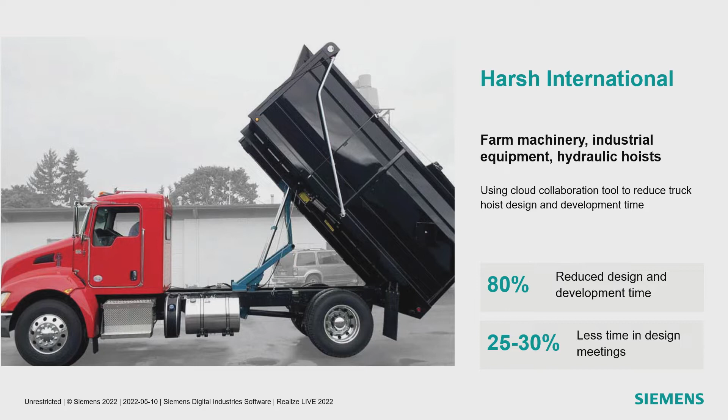Harsh International is a manufacturing company in northern Colorado. We manufacture everything from livestock equipment to hydraulic truck equipment.

Bob came to me with the idea to create a larger hoist, but one that doesn't have the cylinders swinging underneath the truck. With Xcelerator Share, we could click on it, send it to Bob. It didn't matter if it was over the weekend or he might have been in the office next door looking at it. Those guys would be able to pull it up on their computer and just take a look at everything and say, this part could be a little bit different. And I was able to just bounce back those ideas really fast between all of us.

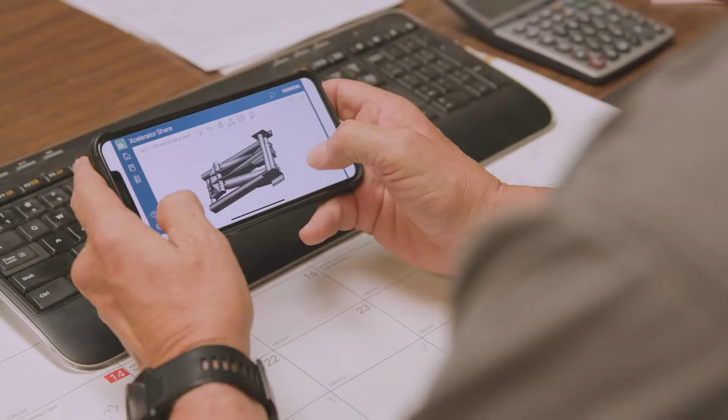The need for people to be in the same room is not near as important as it was before. Now it's on a computer screen. Everybody knows exactly what needs to be done. As soon as they complete it, you see the result right there on the drawing, the 3D solid model I'm looking at. The time you spend addressing that issue is dramatically reduced.

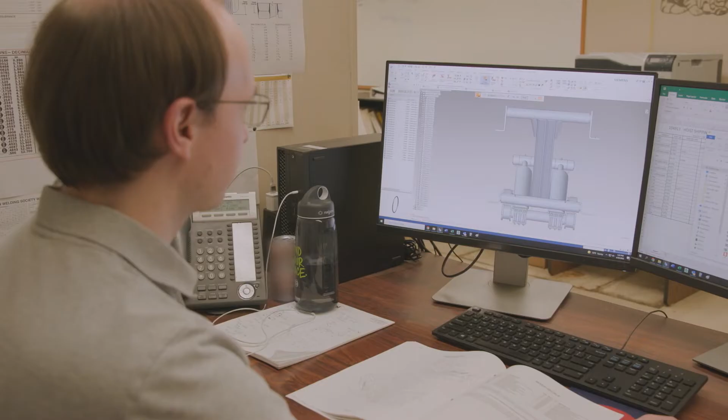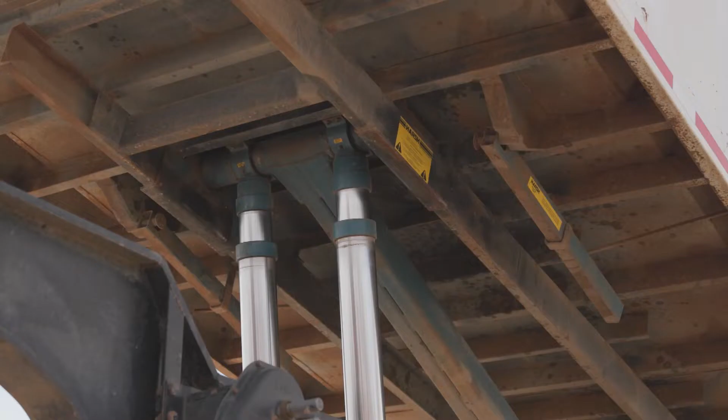Being able to take that hoist from conception to fruition and then on to production in something in the range of 3 to 4 months was awesome. Hitting that market as fast as you can means taking advantage of that market as quickly as you can. That's what Share has done for us.

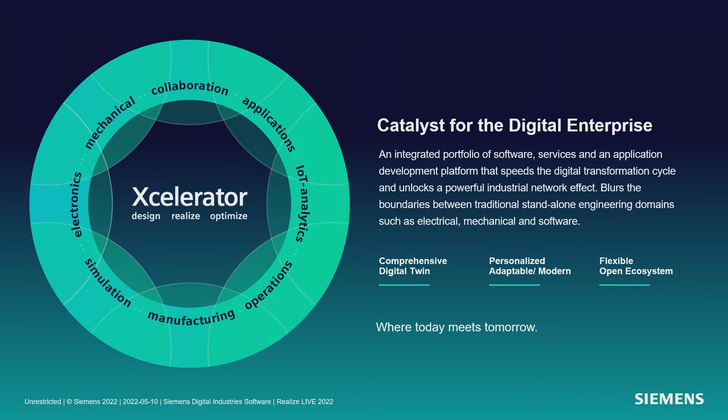Really, Siemens Digital Industries is all about how we help companies like Harsh and like yours transform into a digital enterprise. That digital transformation is enabled by Xcelerator. Xcelerator is an integrated portfolio of software and services, and it really blurs the boundaries between traditional silos like electrical design, mechanical design, software design, tying them all together into a seamless whole. Xcelerator really starts with Solid Edge.

Solid Edge is a key part of the Siemens Xcelerator portfolio, focused on the specific requirements of the small and medium-sized manufacturers that we study so closely. In a way, Solid Edge gives that section of the market access to all these powerful technologies within this broader Siemens portfolio, helping democratize them and bring them to market at a very affordable, accessible price point. So we like to think of Solid Edge as the on-ramp to digital transformation. Now, to take a closer look at the Solid Edge portfolio, which is what this session is all about, I'd like to hand it over to my colleague, Dan Staples.

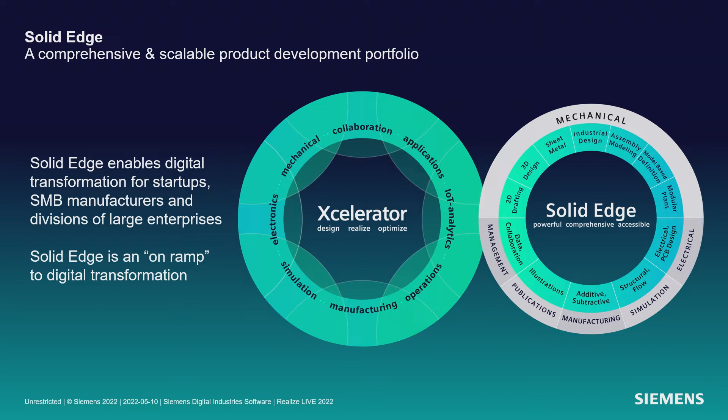Thanks so much, John.

As John said, Solid Edge is that on-ramp to digital transformation. I know many folks think of Solid Edge as a CAD system, and it's a great CAD system and has been for many years, but it's really so much more than that—it's a full portfolio of solutions.

Whether that's electrical design, doing panel and control design, or wire harness, there's a full solution for that. Simulation—the Solid Edge portfolio for simulation is extraordinarily deep, whether it's linear stress analysis, buckling, thermal, heat transfer, or fluid flow, it's all there. This is one of those areas that I feel customers really need to take more advantage of: the ability to do digital transformation by front-loading your design analysis and finding problems before they start. Let's take a look at Solid Edge simulation in more detail.

Manufacturing, I can honestly say best in the business. Obviously, NX CAM has been around for many years, really the start of it 40 or so years ago. Deep algorithms, deep technology that we can leverage in the Solid Edge portfolio.

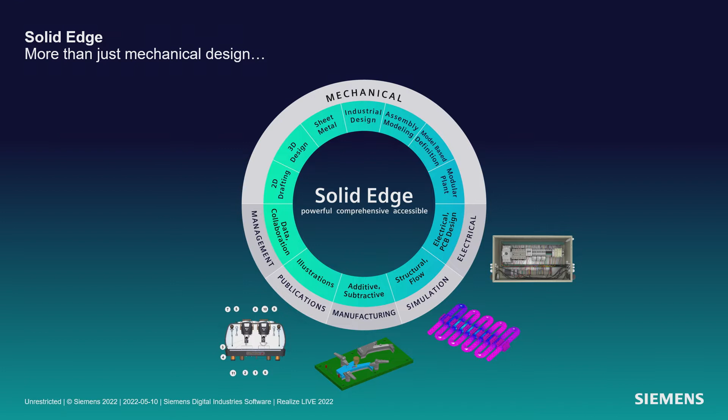Technical publications. There are many folks out there who have built hundreds of thousands of Solid Edge parts. I actually know a Solid Edge customer that's built over 15 million parts in their library. Leverage that data and use it for technical publications, whether those are printed publications or web publications.

And finally, data management and collaboration, a whole suite of tools here, Teamcenter, as well as we'll talk about Xcelerator Share quite a bit more.

So let's delve into that journey a little bit in collaboration. Starting quite some time ago, 2015, Solid Edge ST8, we started looking at streaming Solid Edge through a web browser. Could you, instead of having it on your desktop, stream it through the internet into a web browser? Monthly subscriptions - we talked about that in several sessions this week, different ways to deliver the portfolio to you.

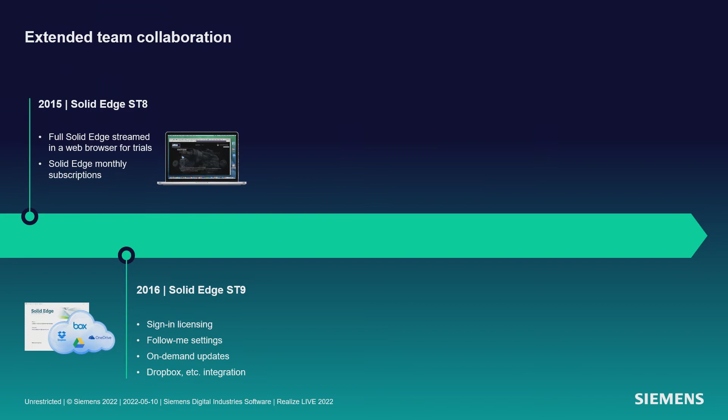ST9 2016, we added the ability to work anywhere in the world. Desktop product, but yes, your settings follow you, your login follows you, etc. Our first foray into collaboration on the cloud using the Solid Edge portal in 2018. And then starting to build out things like augmented reality in 2020. All culminating with where we are today with Solid Edge 2022 and the ability to synchronize to your desktop with secure cloud storage, permission-based project sharing, all built and tightly integrated into Solid Edge itself.

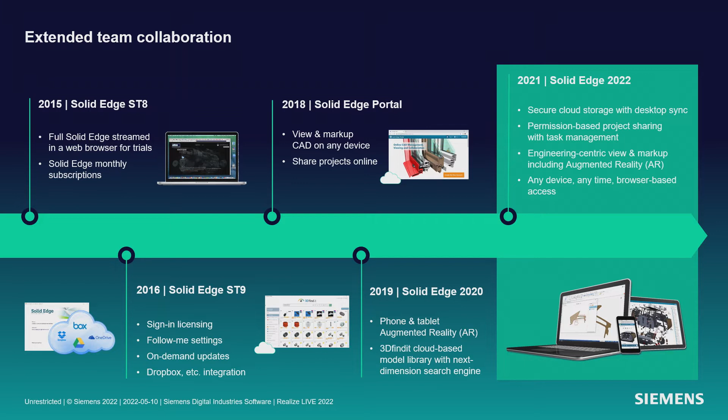And so let's talk about the delivery of that through a subscription mechanism. Solid Edge has always been great CAD software. But what else can we bring to you besides great CAD software? We're delivering Solid Edge on the desktop in a perpetual way as usual, but also delivering something called Solid Edge XaaS. It includes all the greatness of Solid Edge, but also things like secure cloud storage, as we discussed. And it uses the cloud for scalable computing.

Things like augmented reality take quite a bit of horsepower. We can do that with Solid Edge XaaS. Very importantly, collaboration - single source of truth. The ability to collaborate with your customers and your suppliers, upstream, downstream, all that's available to you. And then finally, mobility - anytime, any place, any device, as you saw with the Harsh International case study, that ability to work across the team in disparate geographic locations - they reduced their design time by 80%. 80%, hard to believe, but true.

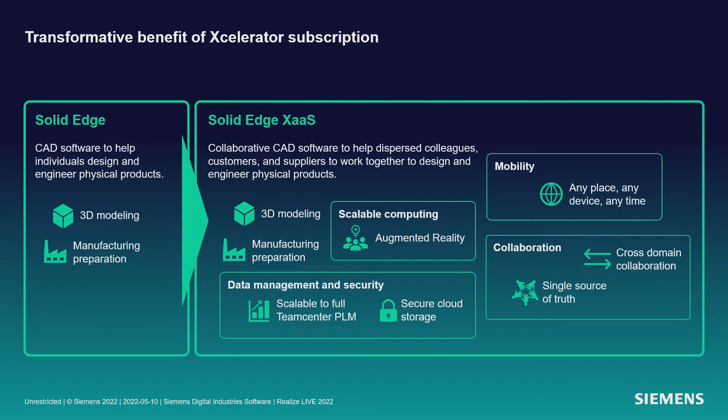So when you think of Solid Edge, I encourage you to think of it as not just a CAD system, but a full portfolio of solutions and the on-ramp to digital transformation. We can deliver it to you in either way you prefer. We can deliver Solid Edge Perpetual, as we've done for many years, and you're probably very used to. But we can also deliver those great new benefits with Solid Edge XaaS, whether that's the mobility benefit, collaboration, but also the bite-sized use of OpEx instead of CapEx, for example.

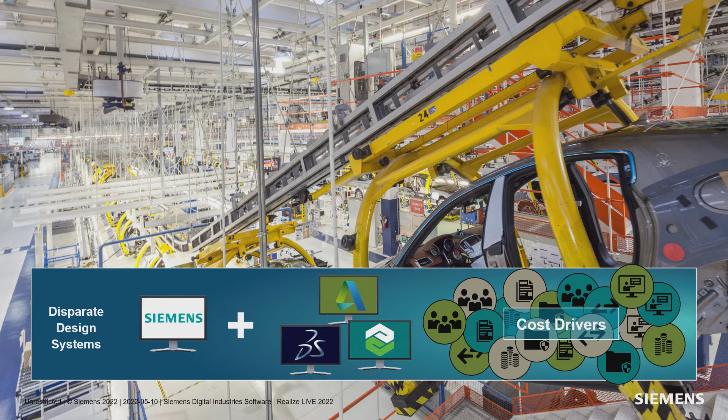One of the reasons we're delivering this flexibility is that we know your operations are complex. Your business is complex, your industry is complex, and it's getting more complex every single day. And we know that's led to what I would say is not an optimal thing. You're having to use disparate design systems if you're a large company. So yes, you maybe have a Siemens tool like NX or Solid Edge as your primary CAD system. But through acquisition or other small departments, you've got a lot of other stuff in there - some Dassault stuff, some PTC stuff, maybe some Autodesk stuff. That just causes a lot of complexity, different licensing systems, different vendors to deal with, and so on.

So I'm pleased to announce a solution to that called Siemens Mechanical Design. Siemens Mechanical Design is a unique offering in the industry - nobody can do anything like this. It's a license that lets you use NX or Solid Edge at any given time, because we know you have a variety of diverse product requirements. What do I mean by change the mix at any time? In the past, it would mean contacting my sales rep, trading in licenses, figuring out how to transfer licenses between divisions.

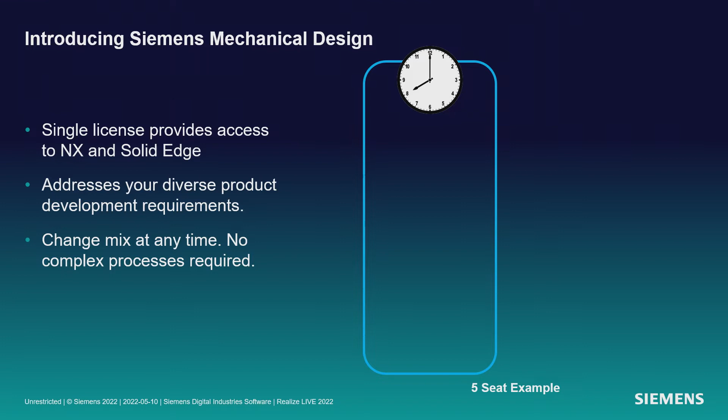None of that anymore. So let's take an example - in this example I bought 5 seats of Siemens Mechanical Design. How might I use those? 8 o'clock in the morning, I start out and I'm using 5 NX seats. So I have 5 designers using NX at 8 o'clock in the morning, and I've used up the 5 seats of Mechanical Design. So no Solid Edge being used at this time.

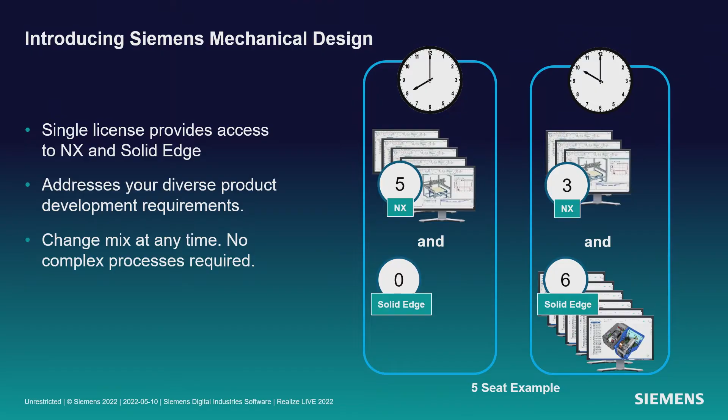But a little later in the day, I have a different need, and 2 of the guys have logged out of NX, so now they're only using 3 of the mechanical design seats. It's actually a 3-to-1 ratio, so I can use 6 Solid Edge seats at this point in time. So literally in this 5-seat example, I can use 5 NX, or 15 Solid Edge, or any mix and match in between, no trade-ins, no discussion with anyone, and so you can consolidate around this single vendor and the ability to manage this much more effectively.

If you would like to learn more about that, and as I say, this is a fairly new program for us, and we see a lot of folks here at the conference that could take advantage of this because they have, for example, NX with a mix of other systems.

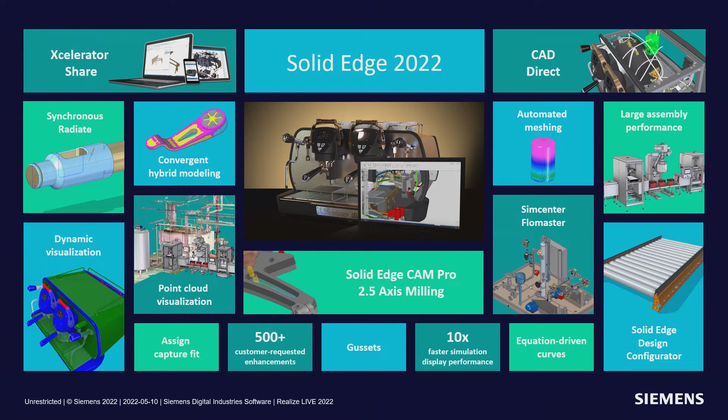I find when I talk to customers around the world, there are many who are using Solid Edge 2022 the same as they used it 10 years ago. They're just using the basic CAD functionality, and there's so much more to take advantage of there. You can make your company more productive. You can make your design life much easier if you look at all the depth and breadth of Solid Edge and take advantage of it.

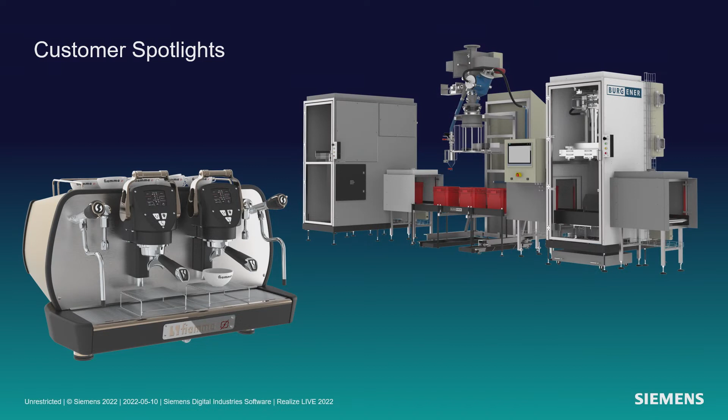As we go through this, I'd like to spotlight a couple customer data sets that we've been able to use in our demonstrations here. First of all, coffee maker, espresso maker from Fiamma. Really appreciate that. There's so much breadth here, we can't even cover it with a single data set. And a pharmaceutical packaging machine from Burgener. So I'd like to thank both those companies for allowing us to use that data, and for their Solid Edge usage and the great work they do.

So let's start with the core of mechanical design. And we're going to cover CAD Direct that I talked about. We're also going to cover the convergent hybrid modeling. And there's several other things we'll cover as well. There's just really not enough time to cover all the features, but let's cover a few.

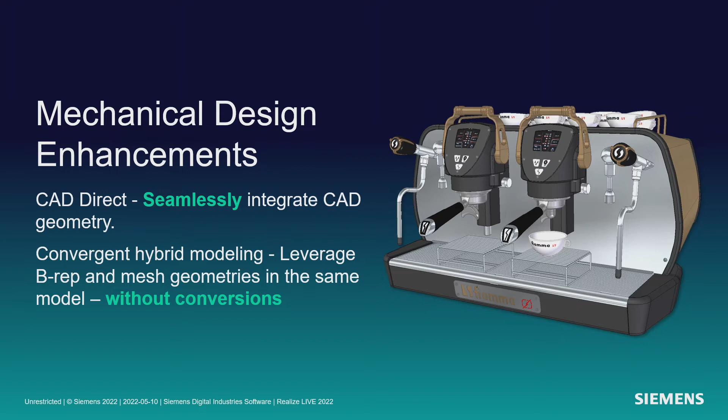So let's start out with something called subdivision modeling. It's a technique for modeling that allows you to make very interesting and beautiful shapes very, very quickly.

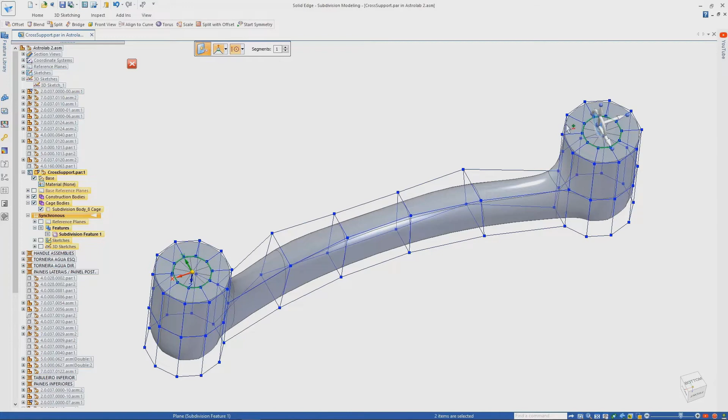Using the bridge command, we're able to bridge between these two surfaces, but we now also have the ability to use a follow curve kind of command, so I can modify the cage and cause it to follow this curve super easily. I can also create curves in context, meaning I don't have to have a curve pre-existing. I can just sketch it as part of the command and really morph this into a shape that I'm happy with. We've added additional facilities to split the cage, which allows us to do other types of modeling modifications. Importantly, this is creating a fully continuous surface, G2 continuous across all the surfaces in the mesh.

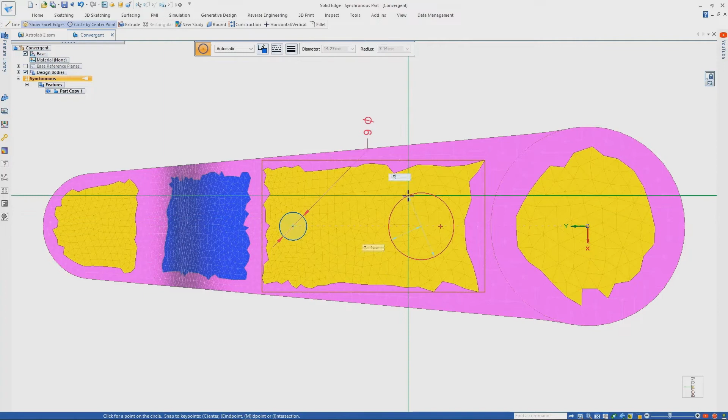Moving on to convergent hybrid modeling. This is a mesh model that's been brought in. The mesh data is a little bit dirty, but we can clean it up very quickly and identify planar regions and circular regions. We can draw sketches directly on it and then do solid modeling commands. We're actually doing a round here between triangles and BREP. This is something you won't see in any other system.

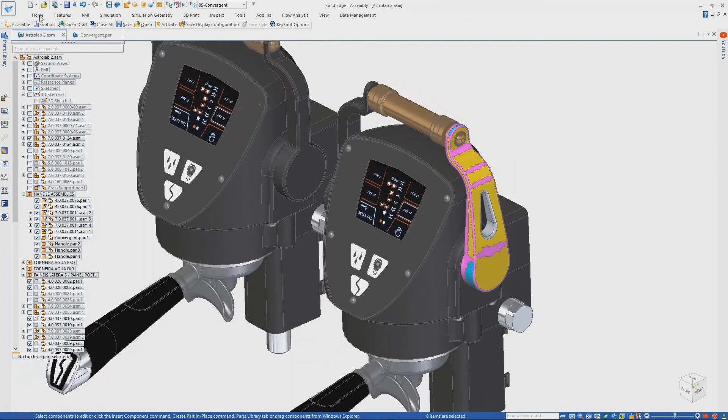One of the things that's most amazing about it is just how transparent it is. You use the same commands no matter whether you're working with mesh or non-mesh, and you just integrate it into your design just like you would any other part. Perhaps we give it a color, and then we just bring it right into the design process.

A lot of enhancements in drawings as well. So family of assemblies, long time coming on this one, but the ability to have like a one spout, two spout configuration, put that directly on the drawing of a bill of materials. Dimensioning to intersections, obviously we've done that forever, but putting the cross lines there between the dimensioned intersections as well. Watermarking on drawings, perhaps you want to use a property, how do I keep track of whether this is available, released, whatever it might be.

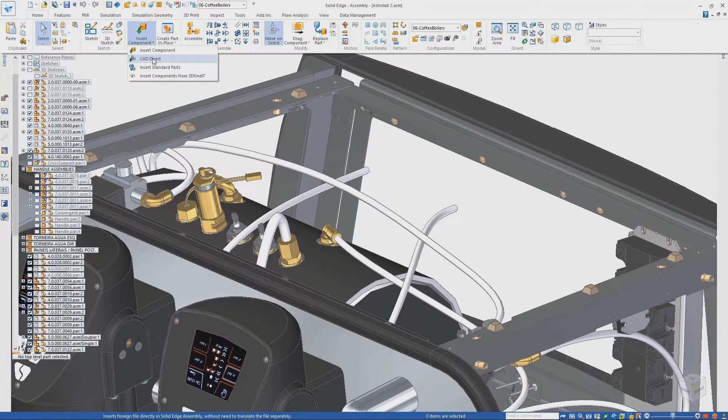And now jumping over to CAD Direct. So in CAD Direct here we're going to use something that was designed in NX, a part of our coffee maker, maybe came from another division, comes to us from NX, and we put it into our assembly. But you notice there's really no translation here. It's just inserted into the assembly using CAD Direct.

Going over to NX, design change required. Let's make that change in NX and come back. What happens? It automatically updates. No files to keep track of. I think that's the amazing thing.

So how often does that happen that you get something from a supplier and then they make changes and you have to get a new one and a new one and a new one, and which one's the right one, and you have 10 files that you re-imported. None of that here. So you can use the geometry directly without translation, and very importantly, that data management nightmare goes away. You simply say, I want to use this NX file, SolidWorks file, whatever it may be, in your assembly, and you're able to then use it and take updates without any extra files or retranslation.

We saw convergent hybrid modeling. This is a unique capability to mix the triangles and the solid models together. Triangles are becoming a more and more popular format, but it's always been this guy in the corner there doing something special with triangles. Now it's part of your design process, very fluid. If you saw that demonstration and thought, well, I can't really see any difference between regular modeling, that in fact is the point.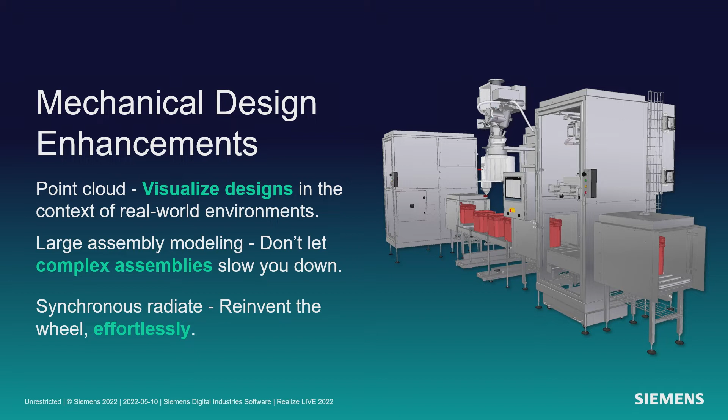Okay, moving on to other mechanical design enhancements. Point cloud, we'll take a look at that, very powerful technology. A lot of work on large assemblies. Our customers start out maybe doing a machine, then they're doing a line of machines. We're getting larger and larger, and we get faster and faster. And we'll talk also about synchronous radiate. Those of you using synchronous technology, a great new capability.

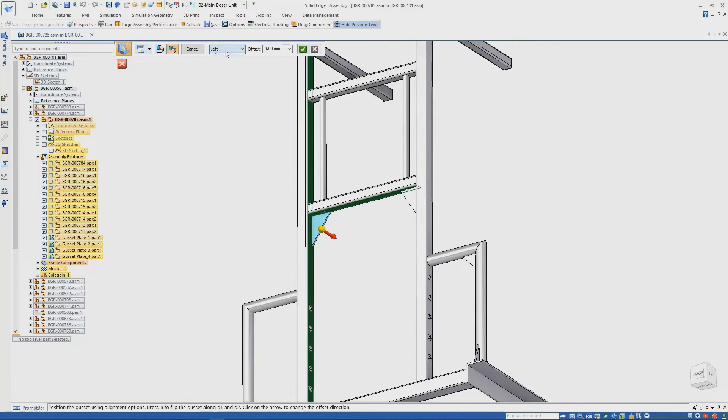So let's start out with a few other things though, like for example, gussets. If you're doing frame systems, it's really common to need to place gussets. It's really effortless to do so. I simply identify the frame members that I want to place the gusset between, right justify, left justify, center justify. Synchronous radiate for radial parts, nothing faster, nothing better. Select the geometry and be able to change it easily.

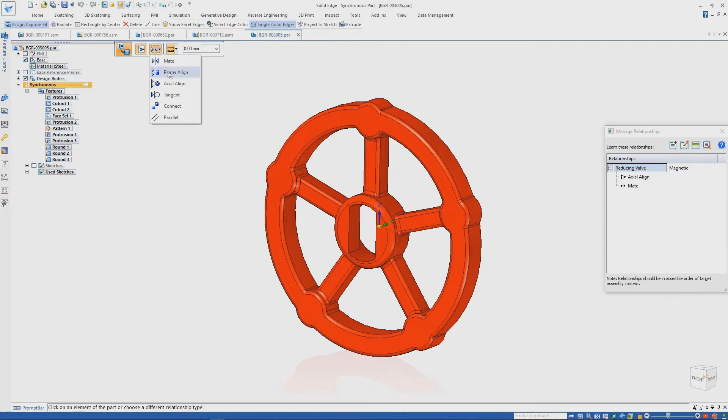We've also added great enhancements to capture fit. So you're assembling parts, why not capture in the part itself how it's going to be assembled? And then we'll look in the assembly for likely candidates for where to put it. Makes it so fast. Watch how fast this handle goes onto all these different locations, it just instantly knows what to do.

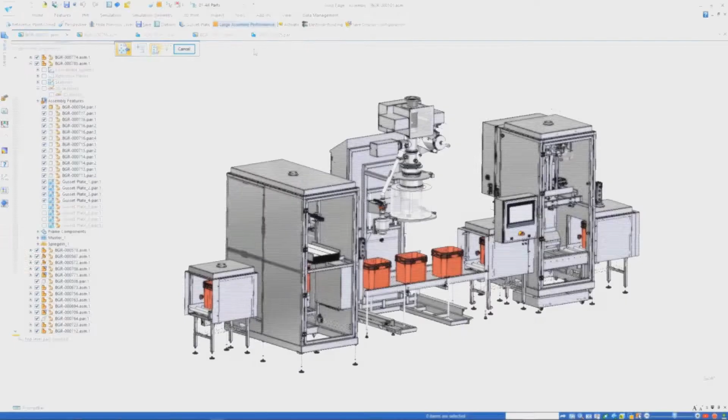You also have the capability to control it. So in this case, I only want to put the bolts on a certain section. I'm going to just put all the bolts there in one go. Amazing productivity.

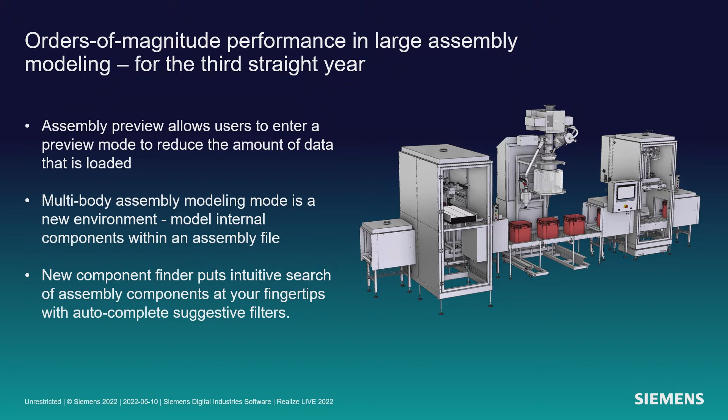One of the things we didn't get a chance to see is large assembly performance - amazing improvements there. In the past, when you brought up a very large assembly, we had to go get all the data off disk, all the different part files, thousands of them, wherever they may be. We now cache a lot of that data directly in the assembly, so you can instantly bring it up, visualize it, and then say, I want to work on this portion here, and when you work on that portion, we can then load that key portion. Massive improvement in assembly performance for very, very large assemblies. Also work on multi-body and a variety of other areas.

Our customers are already seeing the benefits of this. Luca Carminati at CMS was actually part of our beta, back almost a year ago I suppose. That assembly preview mode allows them to do their very large assemblies much, much more cleanly.

We saw the point cloud visualization. This is super powerful - it's a laser scan of the plant. The laser scan gets all the point colors. And what we were seeing, there's no triangles like are used traditionally in display - that was simply a billion points being manipulated in real time, integrated within Solid Edge. And you can measure between the point cloud and the Solid Edge data itself.

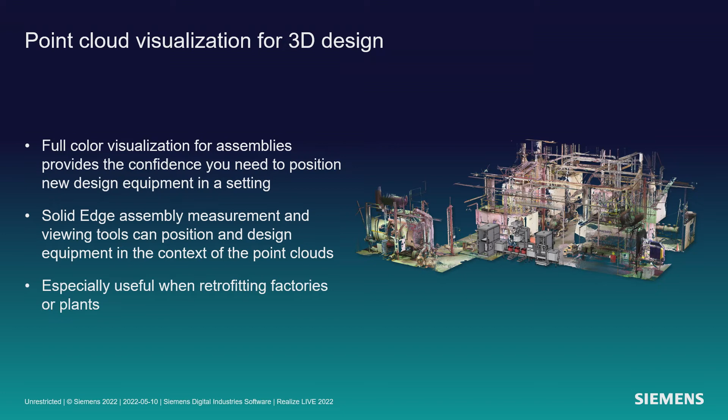Again, customers who had early access to this, like Bergner, really important for those kind of folks. We have folks who make, for example, the luggage handling systems you see in major airports. Beautiful thing to be able to scan in that airport context, put those luggage systems in the middle of that context, see what problems they might have.

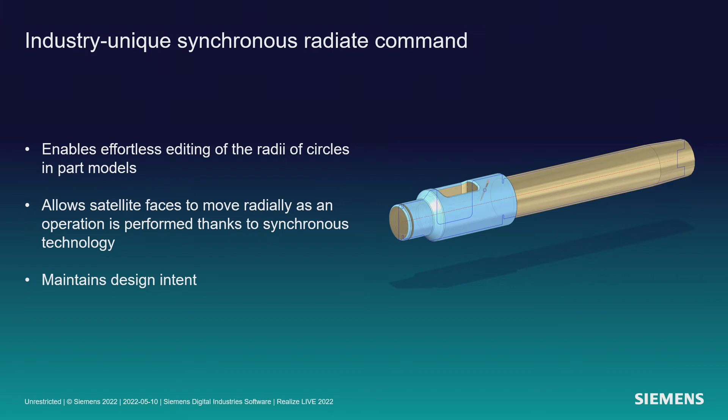And synchronous radiate just happened so fast, so easily, it kind of flew by. But I think that's the point about synchronous modeling - it's just a beautiful thing, super fast, super easy. And now with synchronous radiate, even easier.

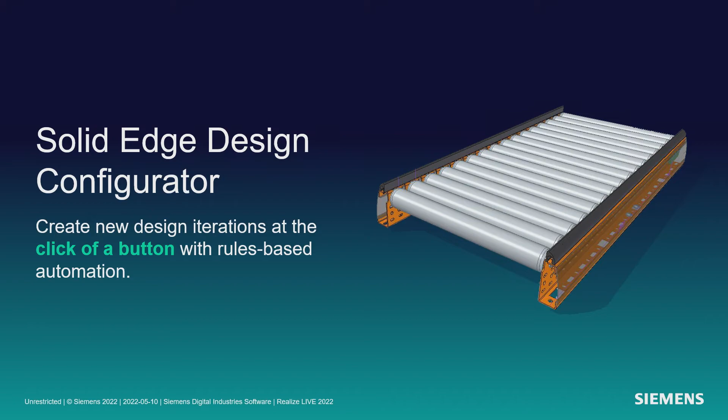In Solid Edge Design Configurator, I'm talking about a lot of different things here, and I would hope that you'll look at all these different things and see how you can make money using these technologies. Solid Edge Design Configurator - if you have anything that is designed to order, sometimes it's longer and has 5 of these, sometimes it's shorter and has 3 of these, but I want a sales engineer even to be able to configure this. You can do that with Solid Edge Design Configurator.

So it starts with the lead engineer - he's the one with the knowledge about what you need to do to configure this. When it's longer, it has more rollers. When it's longer, it has more braces. There's a lot of really deep technology here to put in formulas, if-then-else logic, anything you might need to do to define how things are configured. But when you're done with that, it's going to automatically build an interface for the sales engineer that makes it super easy to interact with.

In a second here, you're going to see up here on the left, this is just a form with 3 or 4 fields in it. Watch how fast it reconfigures the part. As we turn it over, you're going to notice there's 2 braces - a bunch more rollers, longer thing, 2 braces. What if the sales engineer configures a shorter one? It gets shorter, less rollers, bigger rollers, and guess what - only 1 brace on the bottom. So the engineer captures all that knowledge, and then really anyone can configure to order that knowledge.

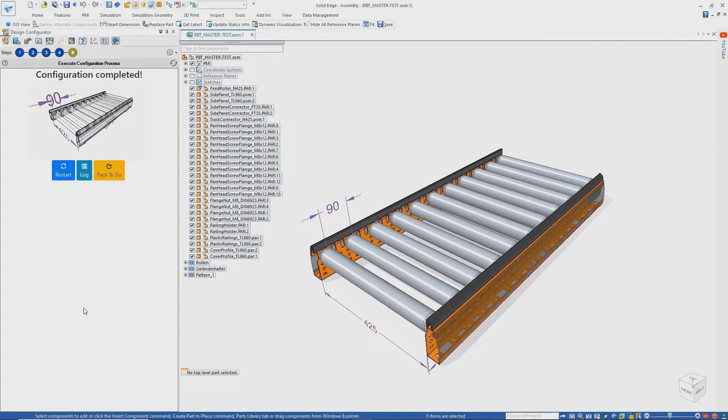So if you have any type of engineer-to-order, configure-to-order process, you really need to be using Solid Edge Design Configurator. Take a look at it. I think you'll be very impressed.

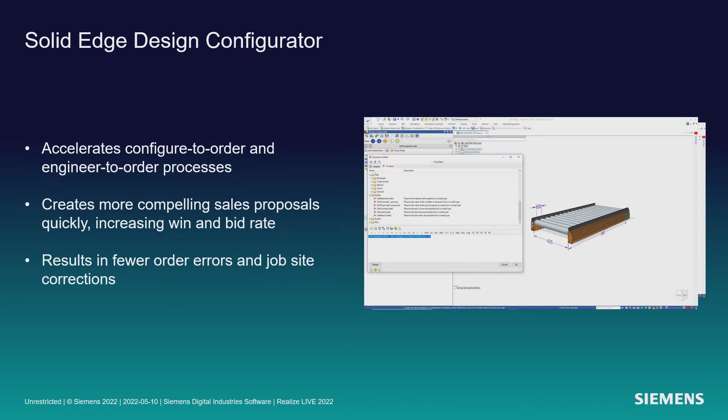What about 2.5-axis milling in Solid Edge CAM Pro? We've had Solid Edge CAM Pro for several years now, based on amazing NX machining technology. So what's the big news here?

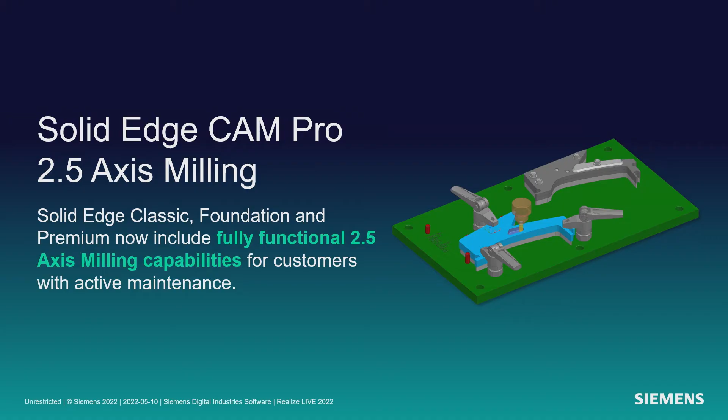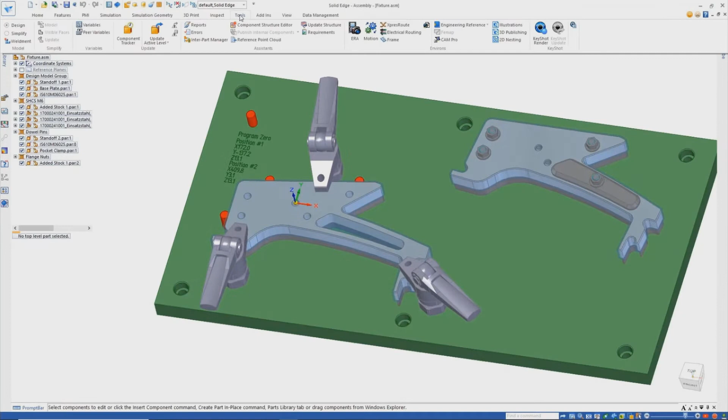The big news is that if you have Solid Edge and you're paying maintenance, you now have Solid Edge CAM Pro 2.5-axis. It's included at no extra charge if you're paying maintenance in Solid Edge. And it's really the deepest and best in the industry, because it's based on this long-standing technology. So we take our Solid Edge part, where we've got a pocket that we need to machine, maybe some profiling and such.

It goes straight into CAM Pro. Many years ago, when I first started in this industry, we used to do pocketing by going in circles, if you will. It's much more efficient to use a scallop-like path, and as you can see here, this is automatically generated in Solid Edge CAM Pro. You see the motion of the tool here and how it operates to very quickly clear that pocket. Whether it's clearing the pocket, profiling operations, or drilling, it's all there for you.

And most importantly, it's all there for you if you're an active Solid Edge maintenance customer. So if you're using some other solution and paying maintenance on that, or you're thinking of buying a CAM system, there's really no point, because Solid Edge CAM Pro 2.5-axis comes with Solid Edge now, as long as you're an active maintenance customer.

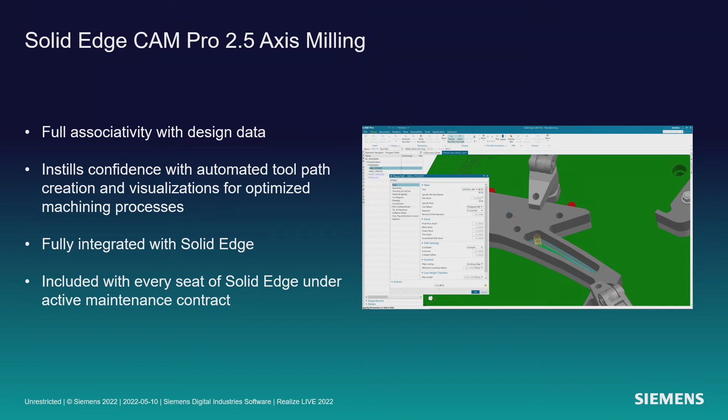So John mentioned Xcelerator Share, and we had the Harsh International case study. I think this is an amazing new capability to collaborate with your customers and suppliers. We see that the world's changed. It already was distributed - people were working in all different locations, collaborating, and so on.

But now, even more than ever, there's work at home throughout the world. How are you going to collaborate with all the different teams in different locations? Let's take a quick demo of how it works.

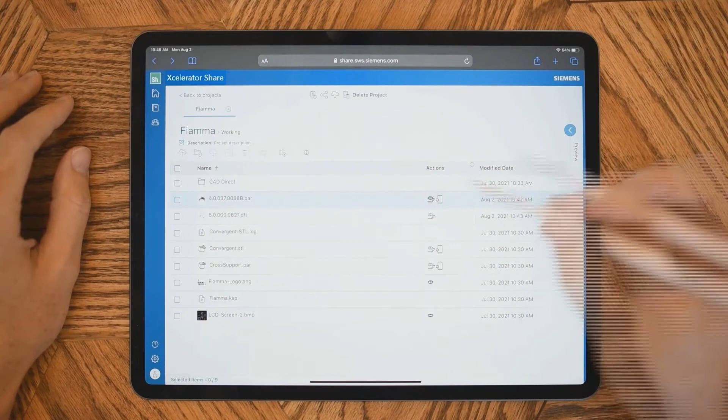So we start out here, and we're actually on an iPad or Surface, some sort of device. We can explode the assembly, we can look around at it, and we say, oh, you know what, I think something needs to be different here. I'm going to pop into one of these parts and annotate some changes I need.

Simple to do - rotate the part around, and say, well, I think we're going to need a pocket in here, so I'm going to put a little text note here, and it's kind of cool because I can scribble it out. I can write in here by hand, and it's automatically turning that into real text. So he wants to create a cutout - done.

Now I need somebody, the actual engineer, to do this work, right? So I'm going to send this off to him. Much like Dropbox, there's a connector on the desktop side of things that will automatically be synchronizing the data, so the engineer doesn't have to go up to the cloud and download this data and this kind of thing. It just comes automatically to his desktop.

And then Solid Edge can retrieve that data for the change. Xcelerator Share is built right into Solid Edge. So when I say I want to take a look at the change as required, it pops up the viewer automatically. I can go straight to that remark and see what needs to be done.

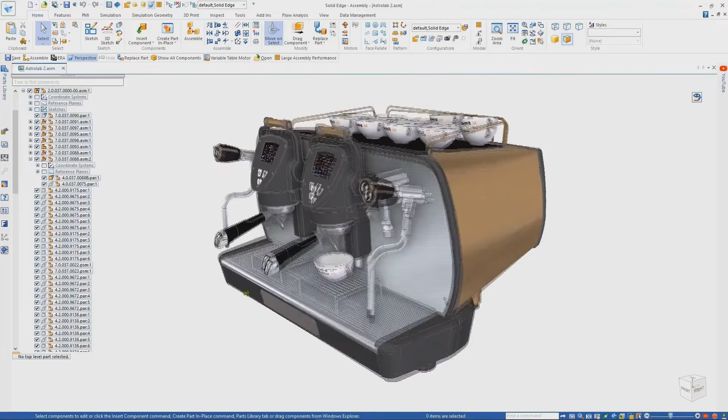I make the cutout, and then again, right within the window here, I'm going to say, hey, I finished this up. I'm going to make a new markup, and I'm going to send this back to the other guy. Or maybe I'm going to send this on to manufacturing production.

One of the great things about Xcelerator Share is you can share the data with the people that you need to, super easily. You simply choose, is this an internal user or external user, and what kind of access do they have? If you want to limit it to view only, you can do that - view and markup, or they can download the data if they need to work with it.

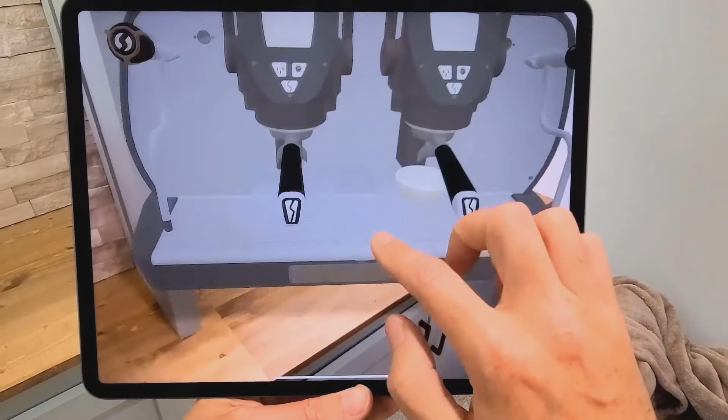We also support virtual or augmented reality through your tablet device. So we're going to take our coffee maker, scan the surface of that countertop so we know what flat is, and automatically put it on that flat surface, integrating it into the environment. If you're looking at Xcelerator Share and a SaaS subscription of Solid Edge, you get this augmented reality as part of that.

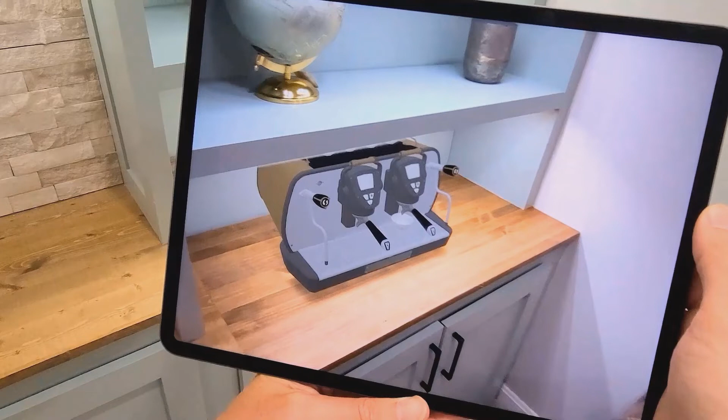So as you see, it's next generation cloud collaboration. Again, everybody's distributed these days. But more than anything, aside from your engineering department, suppliers are here, suppliers are there, customers are here, customers are there. And it's not always a formal collaboration system where you bring them inside your PDM firewall. It's often a very ad hoc kind of thing, and Share is perfect for that ad hoc collaboration. Any device, anywhere.

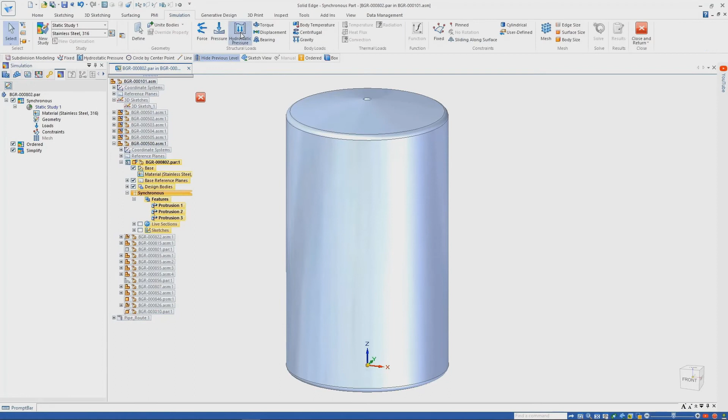Solid Edge simulation. Lots of things going on there, as usual. One of the new features is hydrostatic pressure. You can imagine how much work this would be to do without this technology. So here I just want to load this with a liquid. I say what the liquid is so that we know the density and so on, and it will automatically vary the load from top to bottom. Obviously, the top of the tank has a light hydrostatic pressure, the bottom of the tank has a high hydrostatic pressure. And we can then quickly visualize the results of that.

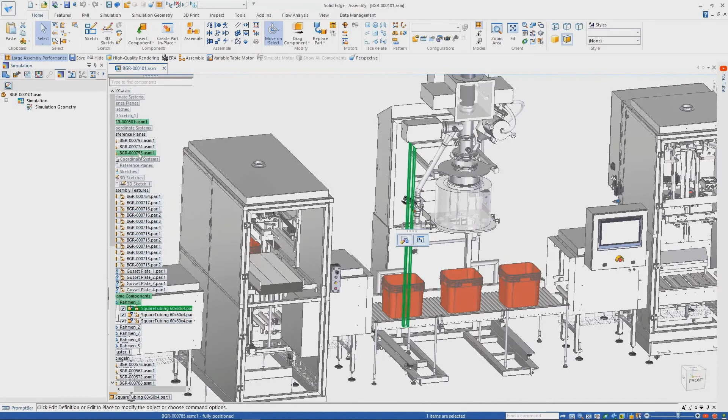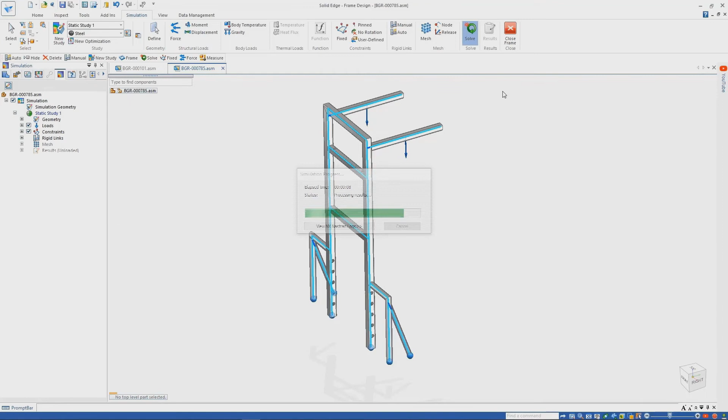We've also made some great enhancements to beams. When beams are put together, they're trimmed in various ways. For finite element analysis, it makes it kind of awkward because they may have gaps between the center lines, or overlaps between the center lines. The way in which we can automatically connect beams in order to do a structure is very much enhanced in Solid Edge 2022. Apply some boundary conditions, some fixed points, some forces, and so on, and there you go.

A great ability to do remeshing. We talk a lot about meshing of parts and that we're getting in a lot of triangles. We have some amazing technology from CD Adapco, one of our acquisitions many years ago, that allows us to mesh meshes. And that allows us to take all this odd mesh data or mixed mesh data and use it very effectively. Some great new capabilities in fluid flow analysis, including the ability to deal with magnetic effects and how that affects your analysis.

So quite a lot of new things in Solid Edge simulation: the new mesh generation across a mesh itself, the hydrostatic pressure, and so on.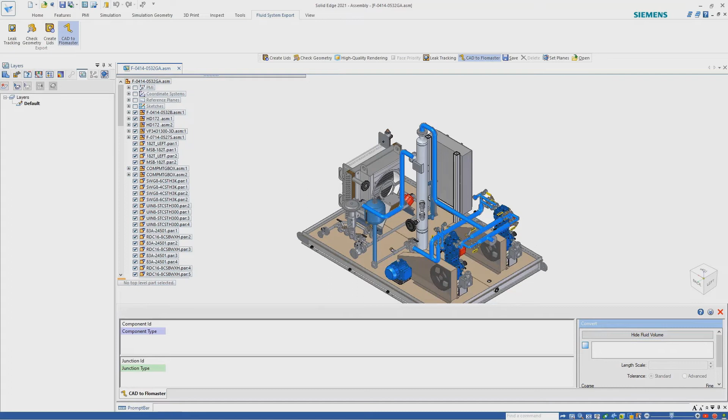And finally, Simcenter Flomaster for Solid Edge. If you're doing any type of piping systems, it's a different kind of analysis - what's the pressure drop and so on. And we can now do that with Simcenter Flomaster for Solid Edge. So we take our Solid Edge assembly with a piping system, and we need to know how it's going to react. It does what we call a 1D analysis.

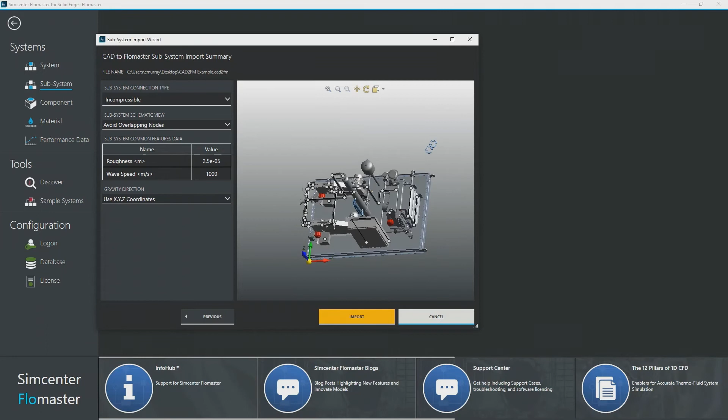It's going to extract the volumes of the pipes, it's going to extract the center lines of the pipes. And then you'll put in some sort of boundary conditions, but instead of things like a fixed constraint and some force, we're going to put in boundary conditions like the pressure at a given area or so on. As I say, it's kind of a 1D analysis, if you will.

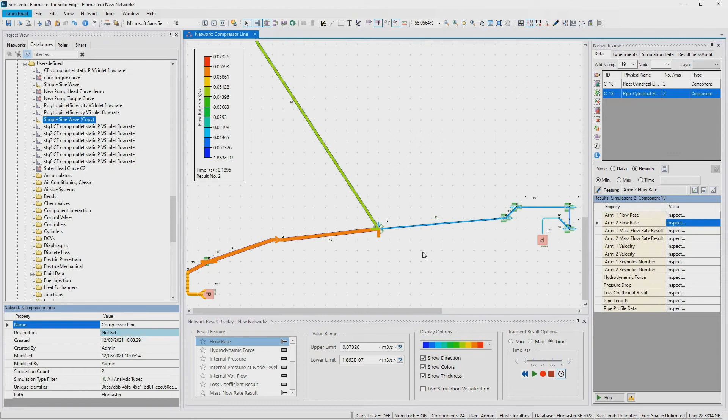So we're going to pop in here and we're going to see the center lines that have automatically been extracted. And in those center lines, we need to put a pressure load at this one end, and we put a pressure load at the other end. And what happens in that system? This is a very complicated problem to solve - that's what Simcenter Flomaster for Solid Edge will do. And we can then easily see exactly how the system reacts to those inputs.

Tightly integrated with Solid Edge, very easy to use. Something, if you're doing piping systems, I suggest you look at this very closely.

We've had great response to Solid Edge 2022. Folks like Karsten at FOCA, simply enormous. Everybody's saying best release ever, biggest release ever. I think that's very accurate, and we'll continue to make each release the biggest and best ever. Now, I only was able to show you a few things here. There's just a lot more than that, if you can believe it. And so I invite you to learn more about it.

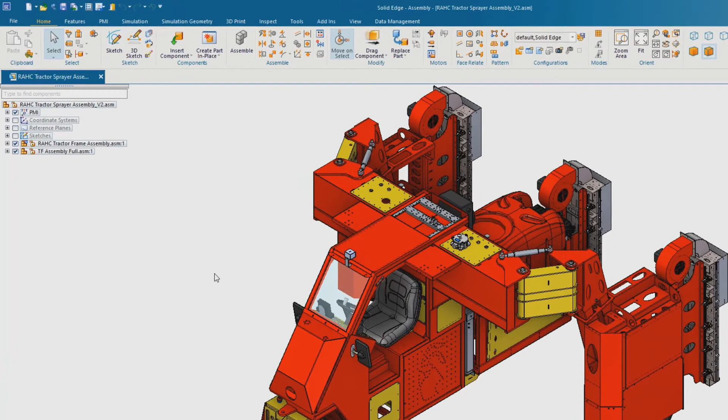First of all, you're going to see the user interface is quite a bit different. It's been streamlined, the colors harmonized, and so on. So you might not recognize Solid Edge at first, but this is good old Solid Edge you're used to. We've taken a lot of the lessons from synchronous technology and moved them into ordered modeling.

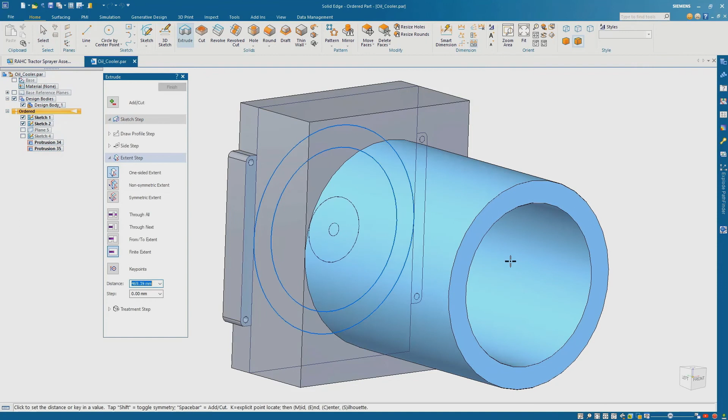One of the great things in synchronous is the regions. No more trimming profiles, no more trying to figure out if your profile is closed or not. You simply select the regions and the system does the rest for you. You can see how quickly we're developing geometry here because of the region selection.

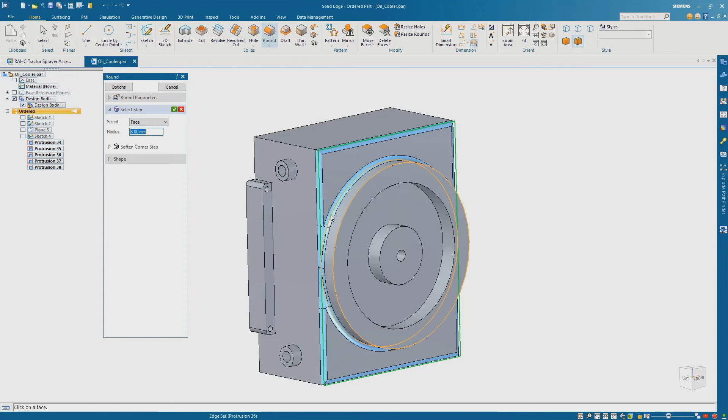Now, one of the things you may notice also is we're doing this in a vertical ribbon style. We'll talk more about that in a second. We've also integrated in a bunch of synchronous technology features, but as direct modeling in Solid Edge.

As we put a few finishing rounds and such on here, what if we want to do a move face? Instead of doing it the old-fashioned way, we're going to do it the synchronous way. We're going to use the steering wheel that's automatically going to recognize design intent of symmetric. So here we say we want to do some face rotate with the steering wheel, symmetric, all the great things you see in synchronous, but now in an ordered modeling environment as well. As we make these changes, you can see how easy it is and how it reacts perfectly.

One other thing I want to show you is Explode. I'll get to Explode in a second. I want to show you first PMI enhancements and MBD, great ability in Solid Edge already, augmented significantly in Solid Edge 2022.

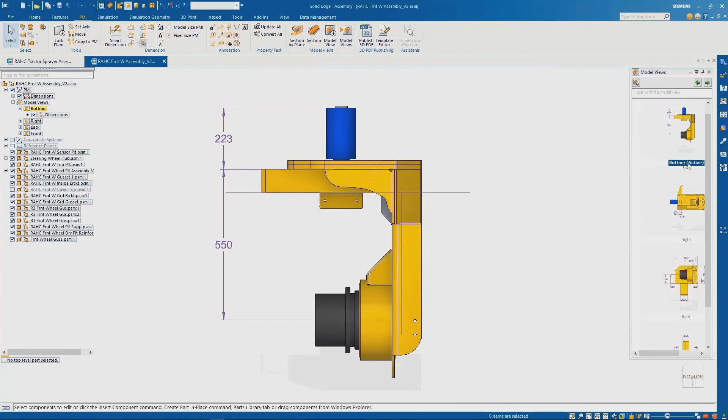This great new thumbnails on the right here, the ability to have your PMI easy to snap to, know what you're doing. Creating views, now super easy to capture something from one view, take it to another view. Simply pick a view and say, I want to create a drawing. Dimensions and everything right on the drawing automatically.

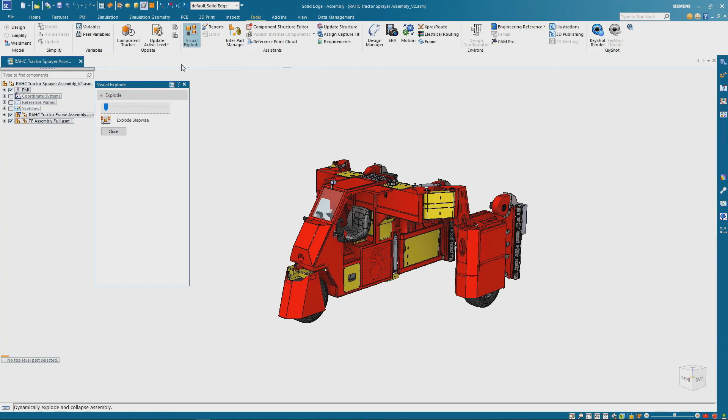That easy. And then finally, some great new technology in Explode. You saw this in Share, the ability to very quickly explode out an assembly and be able to look at all its components really just instantaneously. Look at it from various different views, but also a new enhancement that we just put into Solid Edge only, which is the ability to do it by subassembly.

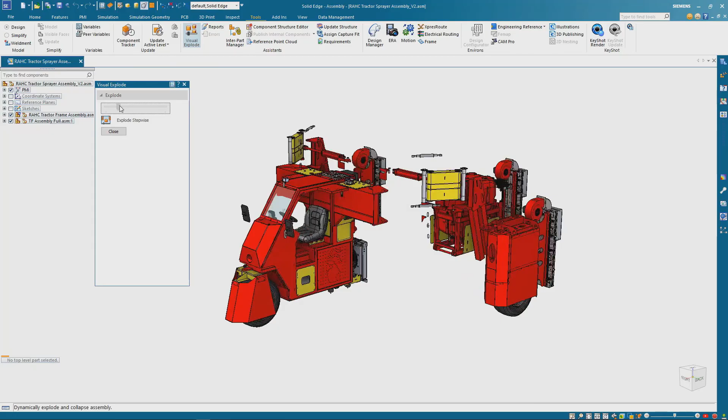So you'll see here, if we set a parameter, we're going to explode it, and the subassemblies explode out. And then if you continue, now it's going to explode out further from the subassemblies. Really, really amazing stuff.

So that's just a little sneak peek at Solid Edge 2023. And I am very excited to release that to you later this year.